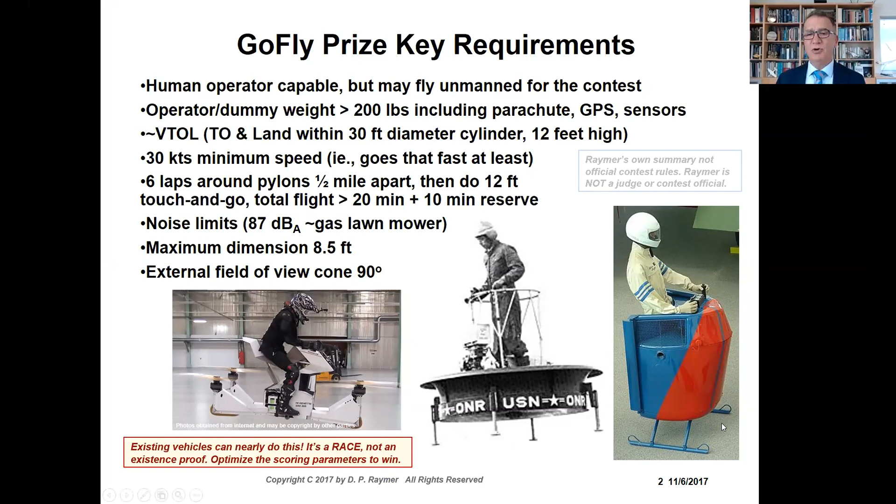Okay, well, let me talk about the whole vehicle design process a little bit, and then I'll go into a couple of details here and there. First of all, we start out with the requirements, and I just talked about them briefly, and we'll normally take customer inputs like that, and we'll also try to come up with maybe a little bit more detailed, a little bit more subtle requirements to guide our own design process, like what we think a reasonable customer would want in addition to whatever the hard and fast rules are.

Okay, well then you go into a conceptual sketch process. We do a lot of that. It's kind of fun. You look like you're just sitting there having fun scribbling things on a piece of paper. But you're really trying to sort through the different design alternatives, figure out where the big pieces might go.

Once you have that, then you need a quick estimate of the vehicle weight. You sort of can't do the drawing, you can't do the design layout without knowing how much the thing ought to weigh, because you have to size the engine, and the engine size is based on total weight. You have to size a wing if you have it. You have to size the rotor if you have one of those. They're all based on the total weight. So we sort of make a quick guess, and then we come back and iterate it later. That's an integral part of the design process.

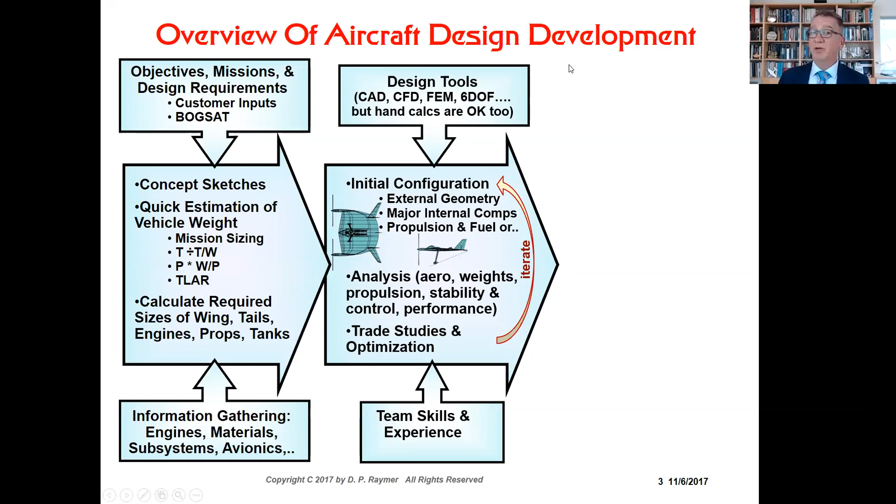Can't tell you anything about it, but what I'm doing right now is iteration number 7. Those of you that are on it know what I'm talking about. I was on a project years ago. We got up to iteration number 100, and then it was canceled.

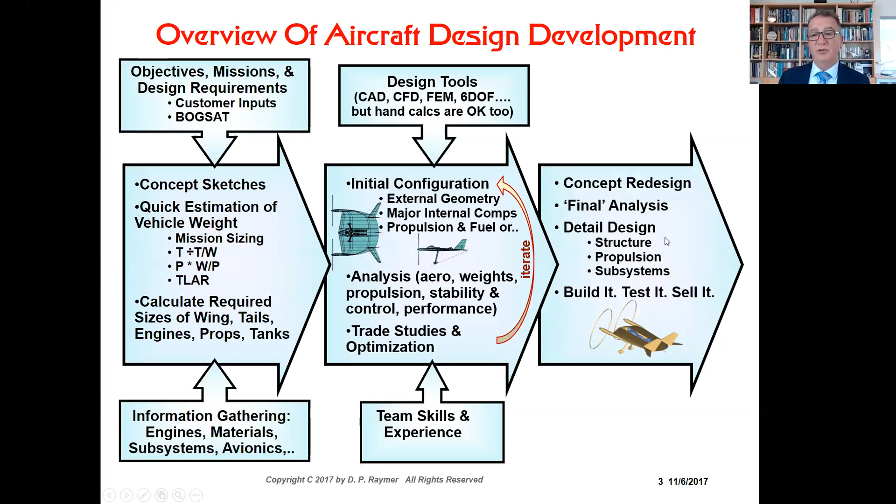Okay, so you iterate through, you come up with a final design, hopefully. You do a final analysis, and this is in more and more depth. You get into detailed design of structure, subsystems, and all those sorts of things. So that takes you to, hopefully, your final frozen design, the one you're going to build. You need to start bringing in the kind of people who can actually build the thing if you don't have them on board already. Actually, a good idea to get them on board on the first day.

You have to identify where you're going to build it. You have to design all those parts. And what does it take? It takes money and time.

Okay, let's see, trying to get to the next one. Let me talk a little bit about some of this vehicle sizing stuff. So there's a couple of ways of doing that. The normal way in aircraft design, the normal aircraft sizing process is based on burning of fuel. And as you burn fuel, the aircraft gets lighter. And basically, there's an integral way of coming up with an equation that tells you the answer.

A guy named Breguet a long time ago figured this out, did a lovely little sneaky integration. If you're interested, it's in my book and all the other books. It tells you the range based on burning fuel, and we work that and come up with a way of actually sizing the airplane. So sizing is trying to calculate how big the airplane has to be. And when I say big, I mean weight. So you're calculating the takeoff weight required to meet some mission requirement, some range, some payload, some endurance, whatever else you might have.

And of course, for this project, it was given primarily as endurance, but you also have to meet a range requirement. So here's how we do it.

Very simple equation. W0 is the takeoff weight of the airplane: crew weight, payload weight, fuel weight, and empty weight, all added up. The empty weight, by definition, is everything that isn't crew, payload, and fuel. So the empty weight includes structure weight, propulsion, all the equipment inside. Everything is in empty weight except crew, payload, and fuel.

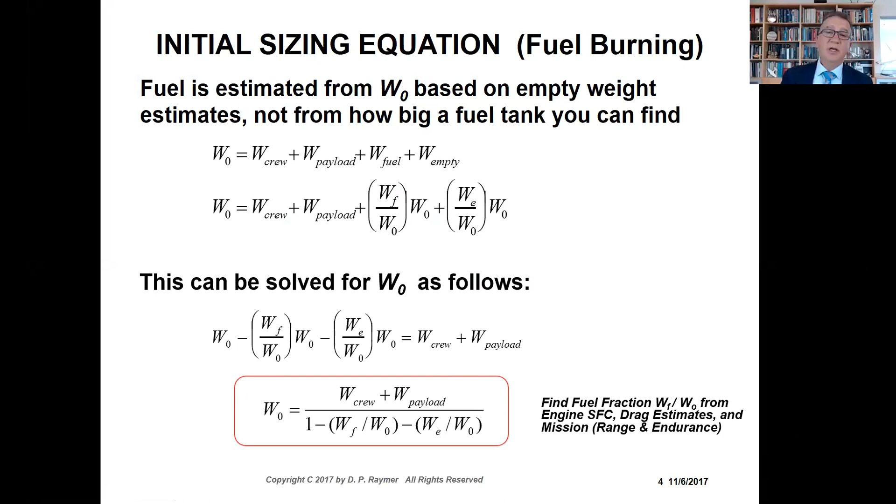The empty weight is much more difficult because you have to add up all the parts, and we haven't even drawn the vehicle yet. So what we normally do is statistics.

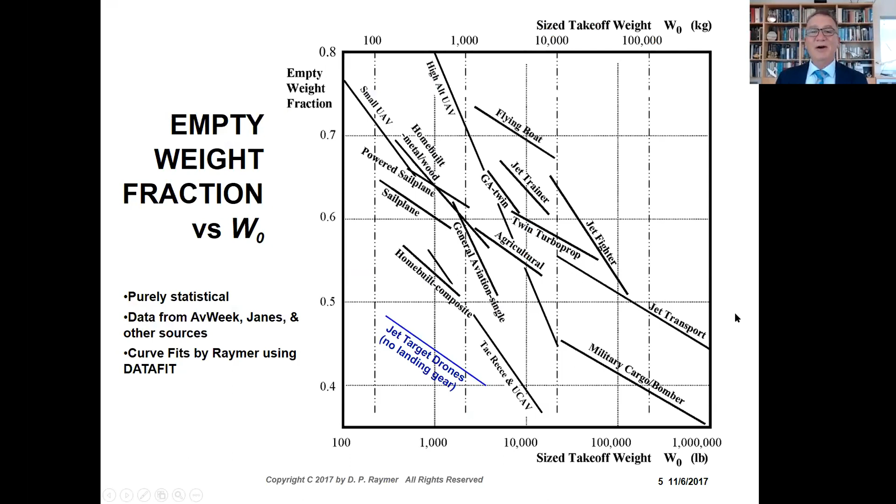Okay, well, that's what you do roughly for an airplane in which you're burning fuel. What about an electric aircraft?

Electric aircraft, you're typically not burning any fuel. Obviously you've got a battery, and an empty discharged battery weighs the same as a full battery. Actually, not exactly—a guy named Einstein calculated how you can find the weight difference, but it's not a big number, so for our practical purposes, yeah, they weigh the same. Even something like a fuel cell electric vehicle, the weight of the fuel itself, the hydrogen or whatever, is very trivial compared to the weight of the aircraft.

So you basically need to find a way of calculating the weight of an airplane that isn't changing weight during the flight. Sounds easy, it's actually kind of tricky.

Most of the time, what we do is we work backwards—at least this is what I usually do. I actually make that rough guess of takeoff weight from a selected power loading, weight divided by horsepower, to give me the performance I'm looking for. I select a candidate motor, and that allows me to quickly calculate a takeoff gross weight to reach this ratio.

And then I lay out the airplane based on that and calculate the weight of all the components, and whatever's left over—I take the takeoff weight and subtract all the other weights. Whatever's left over is battery weight. So I stick in that many pounds of batteries, and then I can calculate how far it goes.

And if it doesn't go far enough, okay, I have to pick a larger airplane and go through the process again, come up with a different, larger motor, work backwards, et cetera. So it's an iterative process—you make a bunch of quick calculations. You don't do a full detailed layout until you think you have the answer. There is an analytical approach if you want to take a look at that.

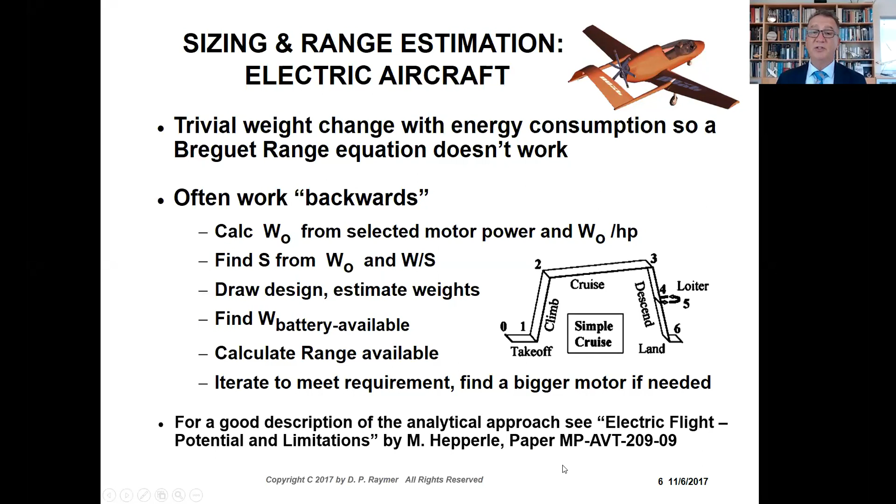It's a bit more complicated, and I won't talk about it here. Martin Hepperle came up with, I think, a rather good paper on this, and I highly recommend that for you.

That's the analytical approach. Now, when you do an electric vehicle of any kind, the big problem is the battery. They're not that good yet. We're a long ways from batteries competitive with a tank of gasoline. Even accounting for engine and drivetrain efficiencies, a tank of gas is about 20 times better in energy density.

That's shown here on this graph. The blue one is a tank of gasoline after accounting for energy efficiencies. This was back in 2002, and perhaps it's a little better now. Here are some newer projections. We're still pretty far away, although we keep getting better. People estimate roughly 1,000 watt-hours per kilogram will probably get you to the point where a battery-powered vehicle is competitive with a gasoline-powered vehicle in speed and range.

If they can make it charge quickly, that will be fantastic, since it's very easy to pour a new tank of gas in. The biggest problem is that as you increase power density, your battery looks more and more like a bomb, so that has to be solved also. Do be careful about college professors and research labs quoting watt-hours per kilogram, because often they don't include all the real-world stuff necessary to put it in a flight vehicle. It's coming, but it's not where we'd like it to be yet.

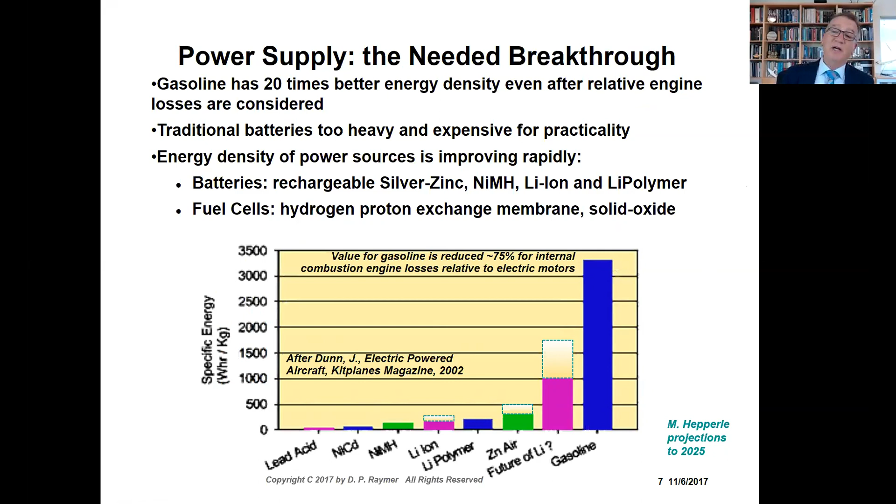Let's see a few more things. We were talking about this overview of the process, and let me talk a little about estimating thrust-to-weight and power loadings, from my aircraft design short course.

We need to estimate thrust-to-weight ratio. If flying on wing lift during cruise, and trying to get a decent cruise speed, there's an easy way to calculate the required thrust-to-weight in cruise. Taking the simple equations in cruise—thrust equals drag, lift equals weight—and combining them gives a neat result: thrust-to-weight is just 1 over the lift-to-drag ratio. So if we estimate L over D as 20, then 1/20th is the required thrust-to-weight ratio, a small number.

In climb, you need more thrust, so we have a slightly more complicated equation involving the components of weight. Combining those equations also gives a neat result: 1 over the lift-to-drag ratio plus the sine of the climb path angle, which is just the desired vertical velocity over the vehicle velocity. So we can calculate the thrust-to-weight required for climb too—pretty easy to do.

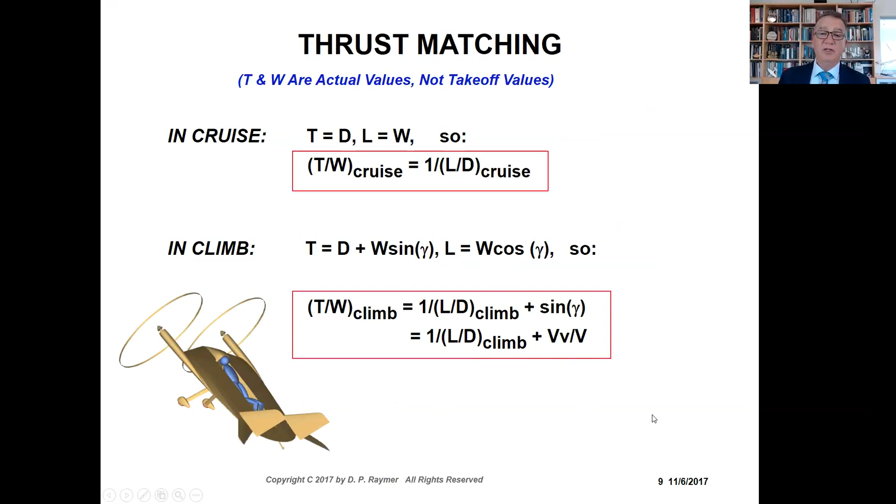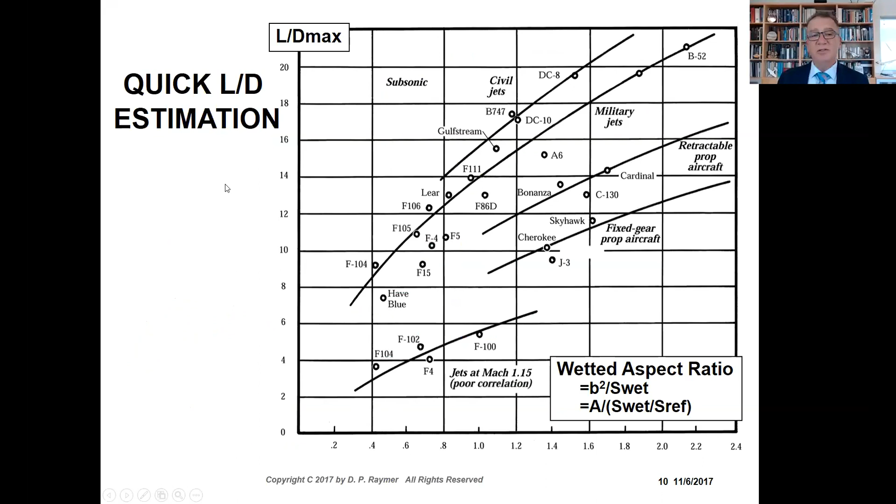What about that lift-to-drag ratio? The right way is good aerodynamic calculation codes. Here's a quick way: if you know the span and the wetted area, you can get a pretty good approximation with this chart. You just divide them, come in here, go up, and read over—a quick number to get you started.

What about power? We can take the power divided by the weight of an aircraft and call that a power-to-weight ratio, and we can calculate a thrust-to-weight ratio from it. We'll talk about efficiency in a minute. So that's what you'd imagine using—it's kind of equivalent to a thrust-to-weight ratio.

But for historical reasons, they came up with something called power loading, which is the inverse of a power-to-weight ratio—the weight of the aircraft divided by the horsepower. It's kind of weird and backwards: a big number means a little engine, a little number means a great big engine. But this has been used for a very long time.

So down here are some typical examples, everything from powered sailplanes with a little tiny engine, so it's a big number, 25, all the way to twin turboprops, regional type airplanes, and they have a small number, so those are very powerful engines for the weight of the airplane.

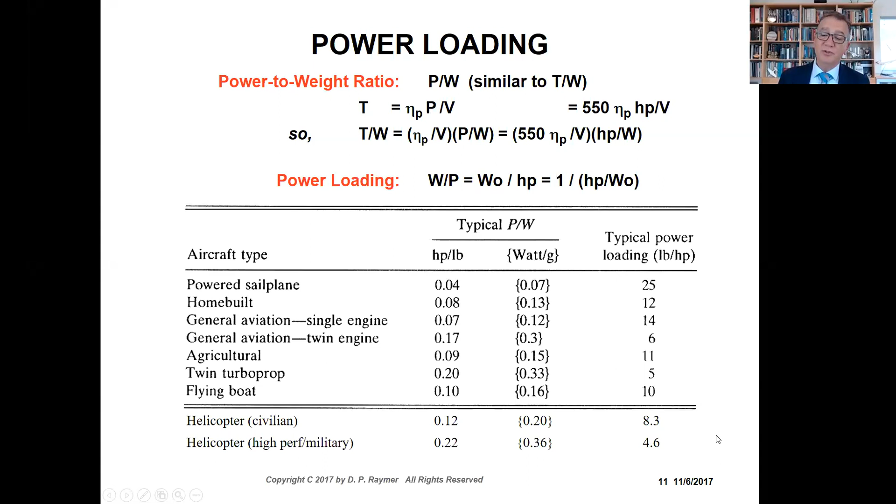Helicopters are actually not even that powerful for civilian ones. They're around 8 or so pounds for every horsepower. Military helicopters that are chasing and fighting bad guys have much more power, as you'd imagine, so they're up close around 5. These are actually reasonable first numbers to use as you're doing that initial layout.

And let's now talk about calculating wing size and things like that. Forgive me for blasting through all this stuff so quick. I'm trying to give you a flavor for what takes a week to learn and a lifetime to master. So forgive me on that.

If you are flying with a wing, and some of the candidates probably won't, but if you are, you want to make sure the wing doesn't stall. If you're trying to make your takeoff with wing lift, well, that's going to be an awfully big wing if you want to get off the ground and clear an obstacle within 30 feet. So I don't know if that's going to happen. But on the other hand, you might take off some other way and transition to wing lift for forward flight, which is going to be far more efficient.

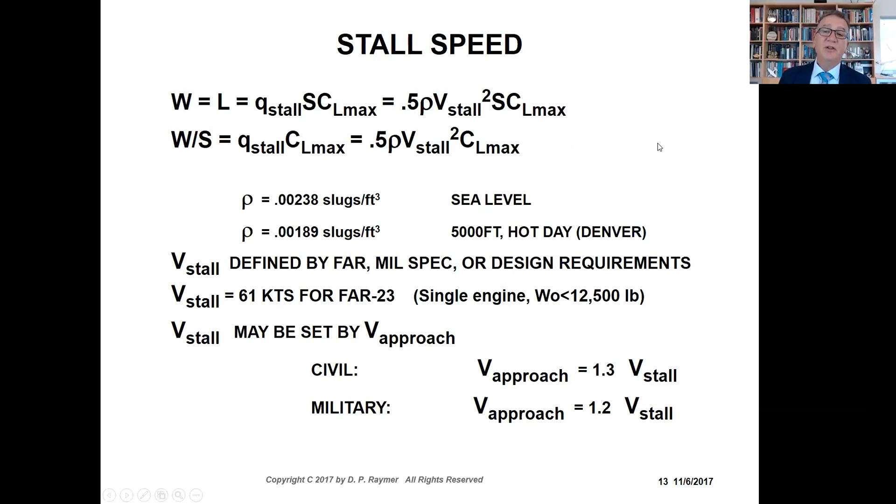So in any case, you need to calculate the wing size required to meet a particular stall speed. We just set the equation weight equals lift, which involves dynamic pressure, wing area, and lift coefficient. These are very standard equations from an early introductory aerodynamics class. So down here are some typical values to use. The most difficult one to find is this maximum lift coefficient.

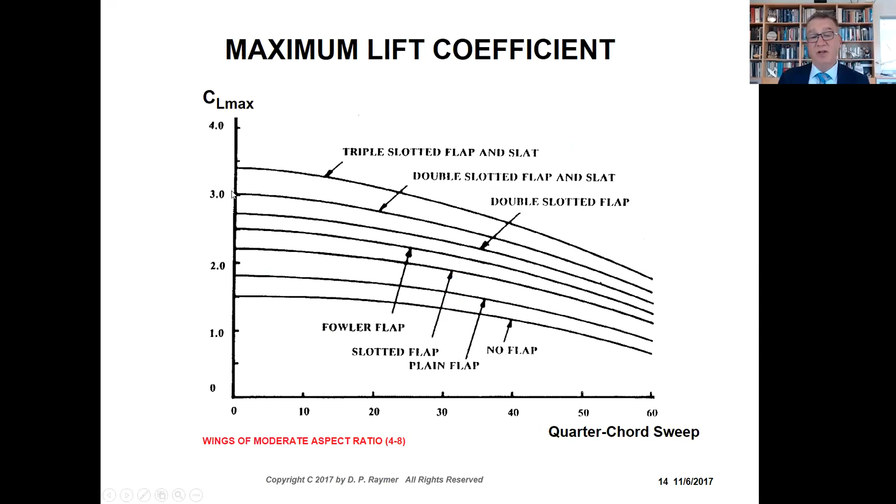So here's an old chart I've been using for years. I think it's Boeing data from a paper a long time ago, and it gives you a rough idea of the maximum lift coefficient. If you have a simple wing like a Piper Cub with no flaps or anything, and it's a straight wing, you're going to get a lift coefficient, a CL max, of about 1.5. Not very good. Put all kinds of fancy flaps on it, you might double that, but fancy flaps aren't free, and they have a whole lot of drag.

Now, if you have the whole wing in the wake of some kind of propeller or rotor, like this funny little design I did, then you can get insanely high lift coefficients, and it's almost fictitious. A lot of this apparent lift is really actually the thrust of the engines themselves at a high angle of attack. But yeah, you can get 10 or 20 or even more if your whole wing is buried in a flow field like that.

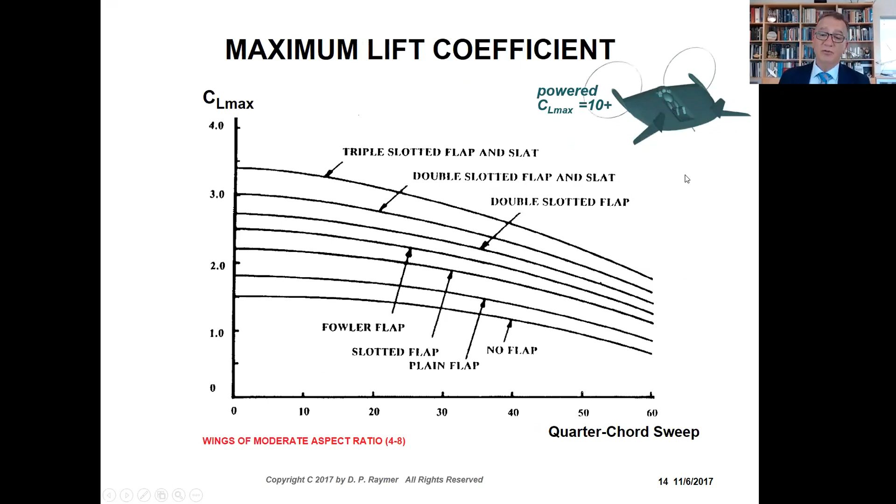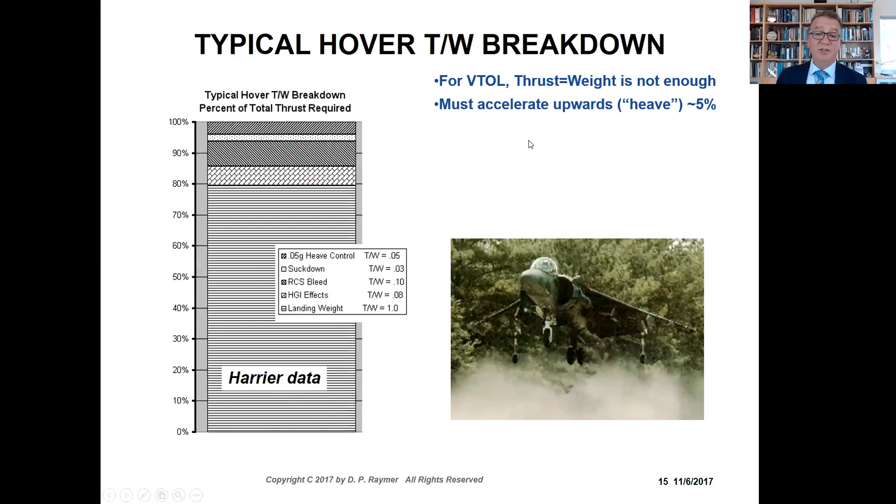Thrust has to be more than weight. You have to be able to accelerate upward, so you have to go up when it's time to go up. And the normal helicopter requirement is about 5%. So you need thrust of 1.05 times the weight in order to accelerate vertically. Very typical helicopter number. Otherwise, you don't get off the ground very quick, the wind blows you sideways into things.

It's just not safe and doesn't feel right. Whenever you're hovering, you're also blowing air downward, though, so you have to watch out for that. The air blowing downwards literally pushes down on the vehicle. If you have a helicopter underneath the great big rotor, it's 1, 2, maybe 3% of the lift that's lost because of this pushdown force.

For a jet-powered aircraft, you get something very similar. The jet entrains air. In other words, the free air out there kind of gets pulled along, sort of goes for the ride, and it winds up pushing down also. So you have to take that into account. And there is one possibility, though, and that's a fountain lift. As that air blows downwards, it can hit the ground, turn around, and come back up. And that's what the Harrier does right in here.

It actually has 4 nozzles, 2 on each side, and they hit the ground, and it comes back up in the middle and literally pushes up in the center. So you can take advantage of that if you're very careful. But then when you get higher up, of course, you kind of lose that.

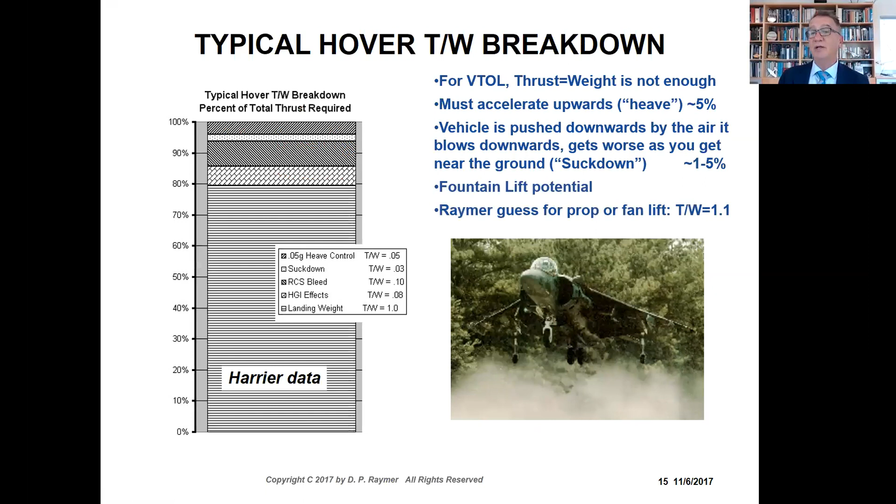So anyway, you need more than just thrust equals weight. I think probably about a 10% margin is reasonable, maybe even more if you're not real sure what exact thrust you're going to get, because you sure don't want to build your vehicle and wind up with a little bit less thrust than needed for takeoff. It's been a long time since that happened. We don't want to repeat that mistake.

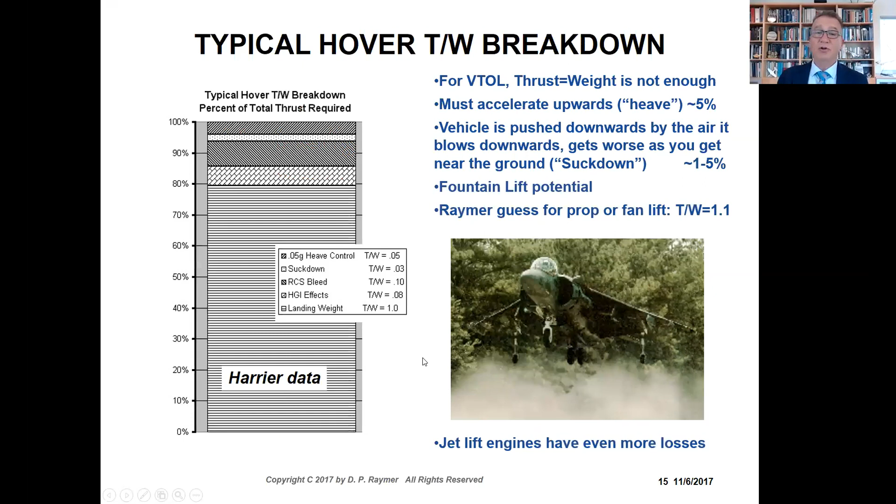If you are looking at a jet lift engine of some sort, I don't know if anybody is, but it certainly isn't impossible. There's even more losses from hot gas and control effects. So just be aware of that if you decide to do a jet engine.

But of course, then you have to drag that thing around in forward flight. And don't forget your 30-foot diameter takeoff limitation. So you have to worry about that.

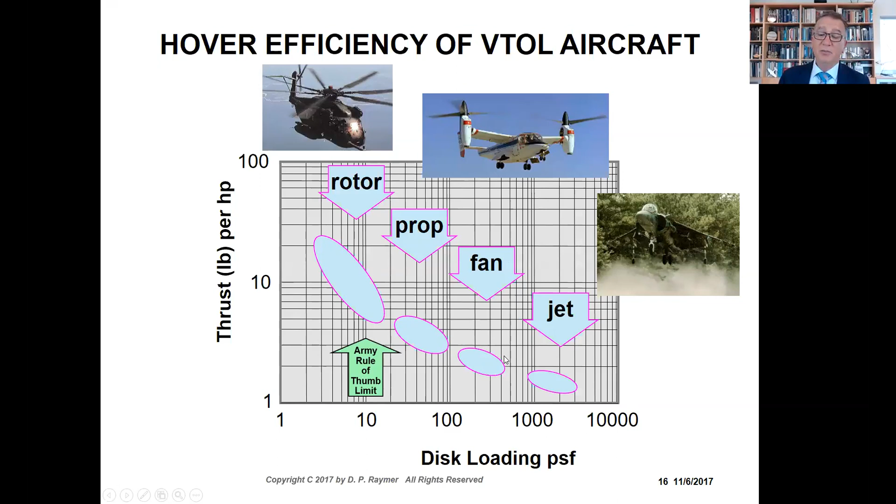Okay, so that's kind of the top level view of vertical takeoff. Let me talk about propellers themselves. What does a propeller actually do? We often say it wrong.

People say a propeller turns power into thrust, and that can't be right because the units are wrong. If you look at it as a physicist, that just can't be right at all. That'd be like turning inches into degrees centigrade, I mean it's just not possible. The units are wrong, so you have the apples to oranges problem. That can't be right.

So what's actually happening is this: a propeller is turning power into power. It's turning one form of power into another. So it's turning shaft power, P, into thrust power, which is thrust times velocity.

And if you look at that and think about it for a second, there's an obvious interesting problem. The engine puts out a fixed amount of power, and that is equal, so the right side is not changing. So if the velocity is higher, the thrust is lower. And that's the real reason that propellers aren't very good at high speeds, it's this fundamental physics. The opposite is true though: if you're flying at a lower speed, velocity is low, so the thrust is much higher.

So if you fly at a really low speed, you get tremendous thrust out of the same amount of power. Now unfortunately propellers aren't perfect, so they lose some of the power, so we apply a knockdown factor. We call it eta P, propeller efficiency. It's a knockdown factor, the propeller saying 'oops, sorry boss, I lost some,' and the typical number is 80%.

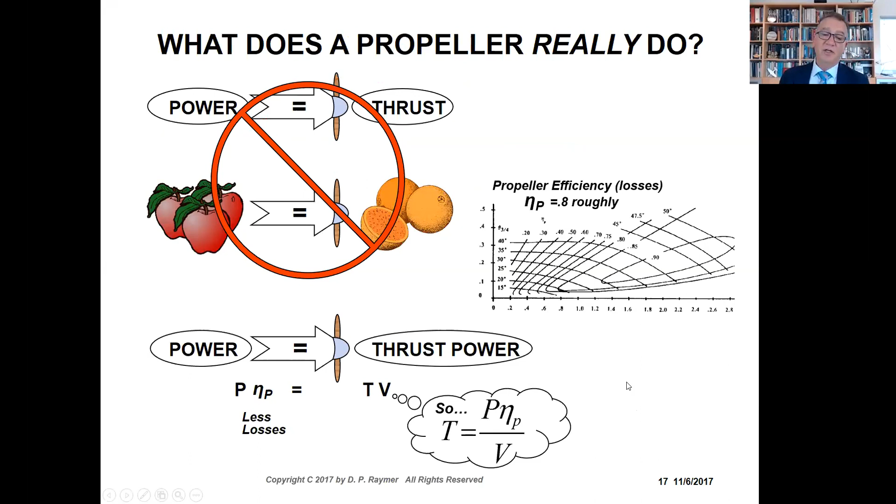Okay, well anyway, if you look at this equation, that's how you calculate thrust in forward flight. Here it is again. But what happens when that velocity term is zero? Well, if the velocity term is zero, it's mathematically undefined. The thrust is trying to go to infinity. So something funny happens, and what happens is the math, the physics is wrong.

And the reason it's wrong is because there never is actual zero velocity at the propeller, because the propeller pulls air into itself. That's why we put a fan on our desk on a hot day - it pulls air through itself and blows it on our face.

Same story. So the people that design helicopters have rewritten the equations to take that into account. I won't go over it here, complicated equations, but when you're all done, it's a nice equation. Or here's a nice approximation out of a good book by a guy named McCormick, Barnes McCormick. Over here, it gives a pretty good estimate of static thrust. Another way is to get some company test data, and it looks typically like this.

On the left, it's simply a graph of test data. The vertical axis is a ratio - these are coefficients, but it's a ratio of how much thrust you get for how much power you put into it. Over here is the rest of the equation, so you stick your power in here, and it depends on propeller diameter. The horizontal axis here is the amount of power you're putting into the propeller or helicopter rotor.

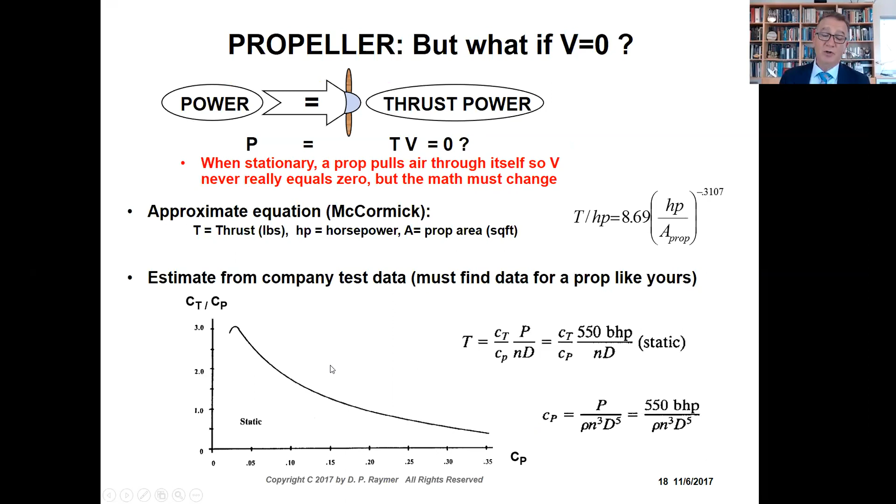And you'll notice it drops as you go to the right. So if you feed a propeller more and more power, you get more thrust, but proportionally not quite as much. In other words, it's less efficient - try to shove a whole bunch of power into a small propeller. And that's exactly what we found back here. That is, this chart: feed a whole bunch of power into a small rotor, you don't get proportionally much thrust.

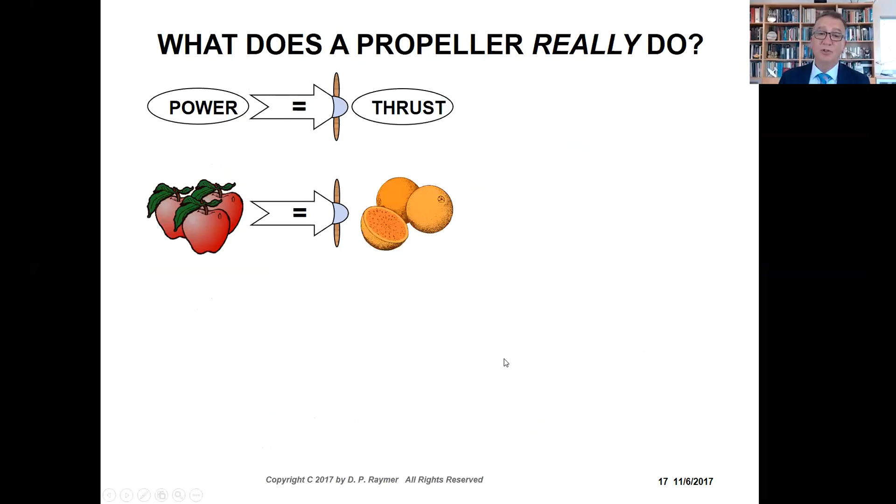Okay, we're almost done here. Ducted fans - there's a lot of interest in ducted fans, and they do have some advantages. Sometimes people don't quite take into account the disadvantages, but the advantages are real. You have less tip losses. Propellers are kind of like wings - they generate lift, and out at the tip, the air goes around the corner, and you lose some of the thrust, and you pick up more drag.

So by having a duct around the propeller, you constrain those losses. You don't have that air going around the tip, so you fix that problem. You can actually control velocity through the duct, and the flow contraction downstream, which hurts free propellers, can be controlled with this. So because of that, you get more efficiency from the same diameter propeller, and it's also safer.

It's safer because you're not as likely to walk into it. It's also safer because if one of these blades breaks and comes off, it won't cut your ankles off, which appears to be a problem in some of the designs I've seen.

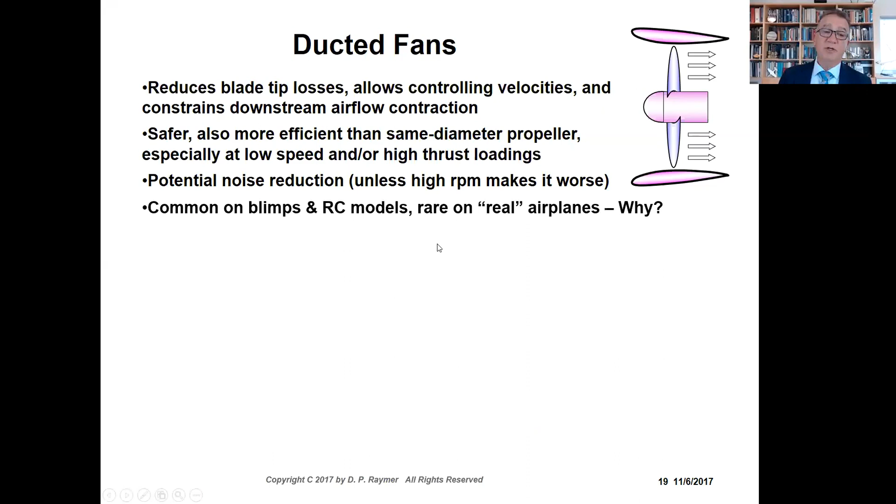So that's safer and more efficient, but the efficiency is mostly at low speeds or high disk loadings, high thrust loadings. Noise reduction - yeah, if you put a shroud around it, a duct that's shrouded and maybe some kind of soundproofing, you can also reduce the noise, and that's a good thing. You see them a lot on blimps, you see them a lot on radio control models. Why don't you see them on real airplanes? Well, it gets worse as you go faster, and that's the bottom line.

The drag of the duct gets worse and worse, and there's pretty much nothing you can do about it. You also have to build these things very carefully. To get good efficiency, this gap here has to be really tight, and to make that tight, this whole structure has to be stiff and attached very rigidly.

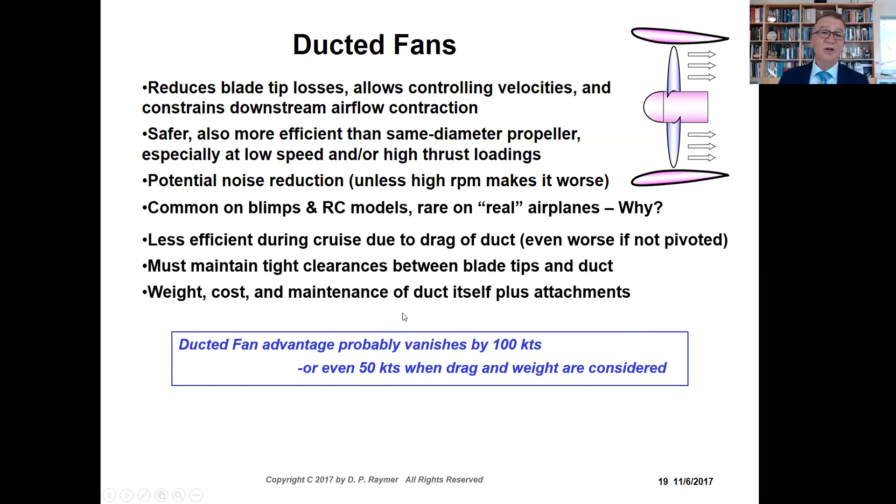So by the time you do all that, there's a weight penalty, a cost penalty, and a maintenance penalty. This is kind of a rule of thumb, but it's probably true: certainly by 100 knots, any faster than that, it's probably not worth having, and maybe even 50 knots if you fully take everything into account. But for this project, this competition, we're not flying faster than 50 knots, so maybe it is an advantage.

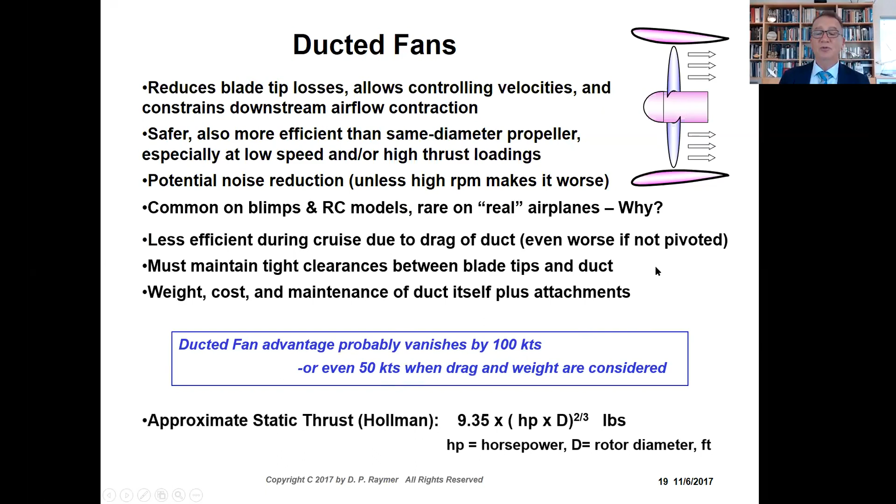Down here is an equation from Hollman to give you the rough answer. Again, if you go to other sources, you'll find rather detailed ways of calculating the actual thrust you get from a ducted fan.

If you're flying vertically in anything like a rotor, a single rotor, you have some serious problems. One of them is the torque. The rotor is going to torque you around the wrong way, so we typically put a tail rotor, which is blowing the opposite direction to stop the torque. That tail rotor needs power, and there's a long shaft and gearing and all sorts of things that lose power. When you're all done, you lose something like 15% of your engine power just counteracting this torque.

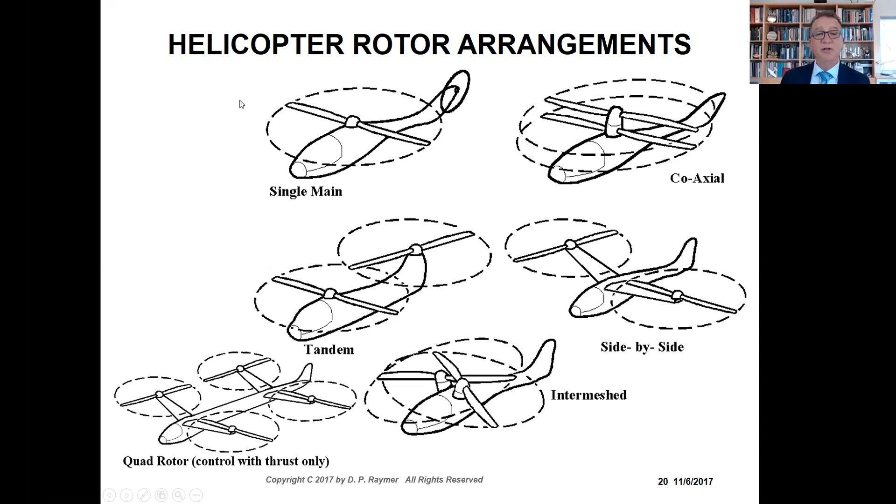So there's something that has come along fairly recently - you've all seen it because you can buy these at every mall now, and that's a quadcopter. These are kind of neat because if you set it up right with these going in opposite directions, you can control roll, pitch, and yaw just by feeding different amounts of power to these things. Electric motors are particularly good at that. This actually enables electric helicopters, and the fact that it's electric allows you to do this. It's kind of neat, and you see this in a lot of the vehicles people are trying to make for small manned vehicles like this project.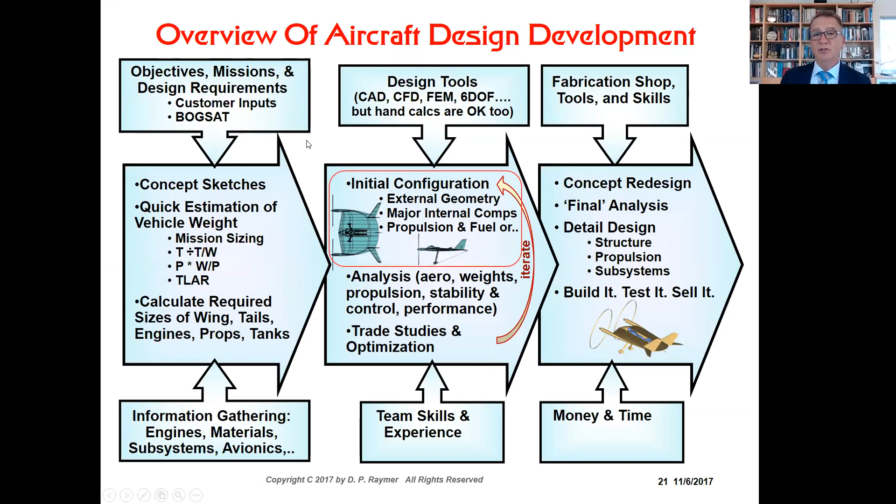Okay, almost done here, a couple more things. We have gone through this initial configuration. We're at the point now where we need to make a layout, and let me talk just a little bit about that initial layout, and then I'll be done.

This shows a typical initial configuration layout. This is actually a project I did many years ago - it helped me earn the reputation as that young crazy guy in advanced design. It was a single seat, pure jet designed for an Army mission, which we never convinced the Army they wanted to do. I don't know if they were laughing or scared to death of it, or maybe a little bit of both, but anyway we had fun. What I want to show you, though, is what an initial design layout looks like, and of course this is done in a CAD system.

What does it look like? Well, you've got all the components, internal components, passenger, landing gear, engine, payload, whatever that might be, landing gear basic geometry. You've got the overall arrangement, wings and tails and stuff like that.

OML stands for outer mold line. You need a reasonably good external definition. It doesn't have to be perfect. Given the fact that we're going to change it so often and iterate, it's a good idea if you're not stuck with a CAD system that forces you to make it perfect. That's kind of negative work because you don't really need a perfect geometry now. But later you have to get perfect geometry, of course.

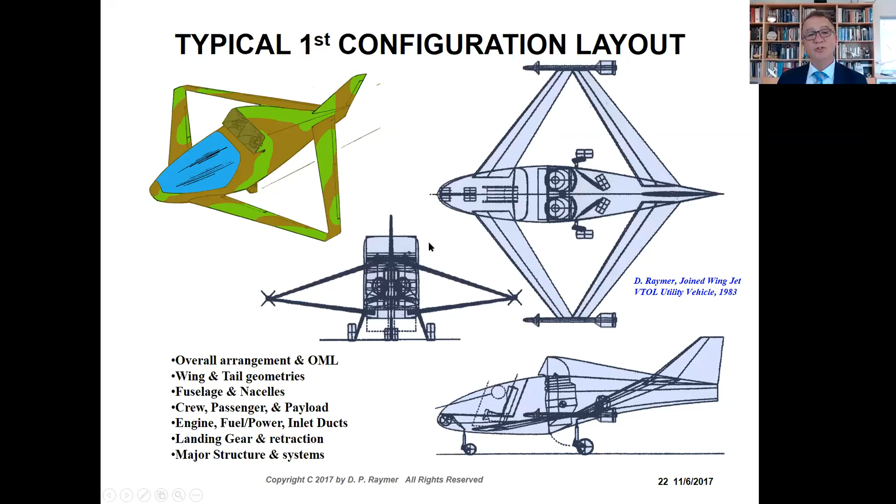Fuselage, nacelles, all those sorts of things have to be there. Major structure, systems, fuel tanks, all that stuff has to be in this initial layout. And then you take this layout, run all the analysis you can on it, get all the experts to look at it, and make the second layout. So you iterate through the design process.

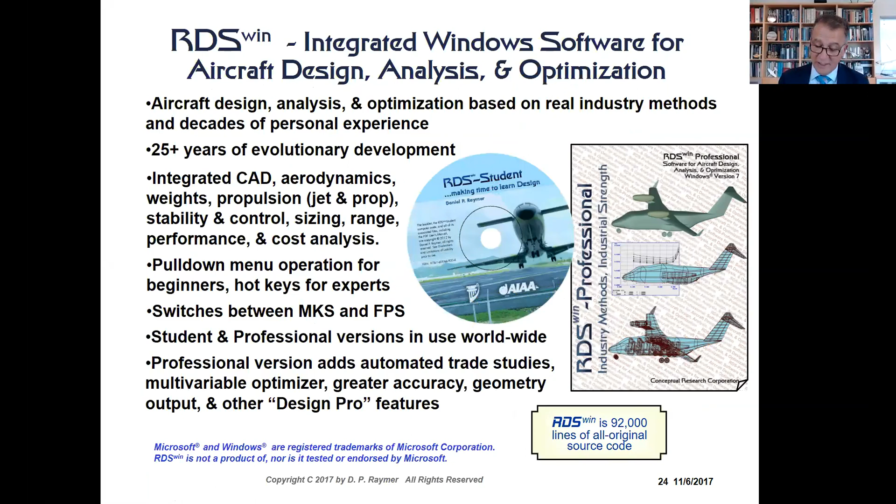I'm not hearing anything.